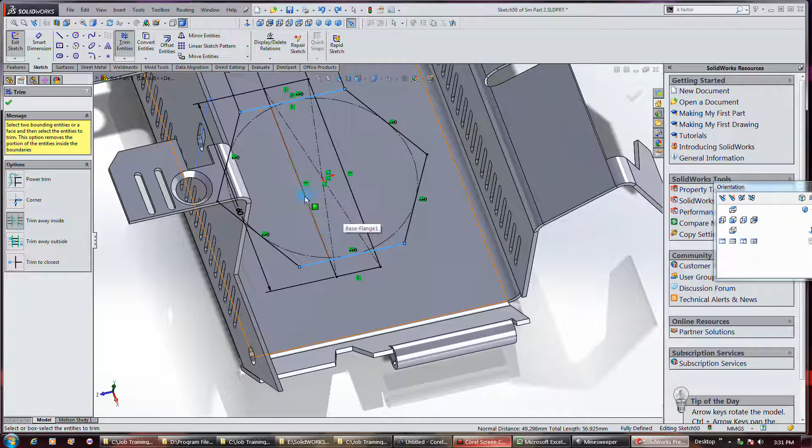Okay, I'm drawing this thing to cut out. Trim entities, select trim away on the inside, choose these two curves, or these two lines, and then trim that away, and then just go like to here, and holy shit.

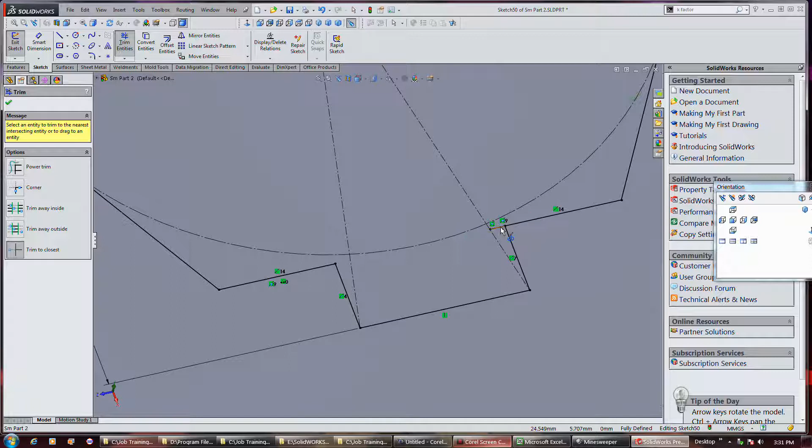I don't know why I need these circles and shit in here. Okay, god damn it. Alright, now let me take that and do a whole cut thing, you know, link to thickness, and voila.

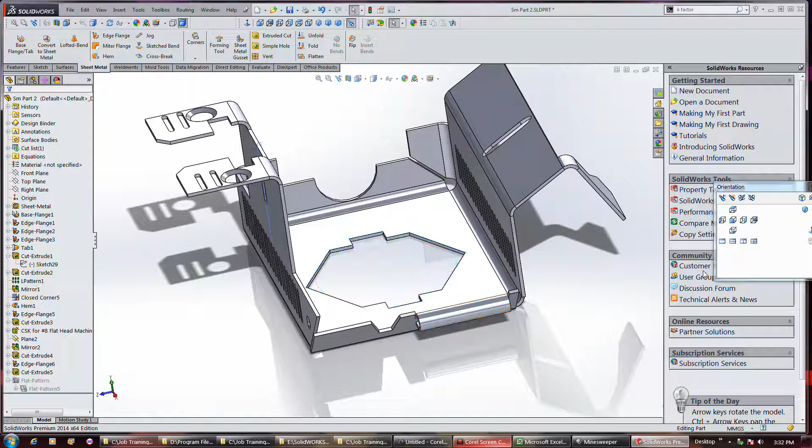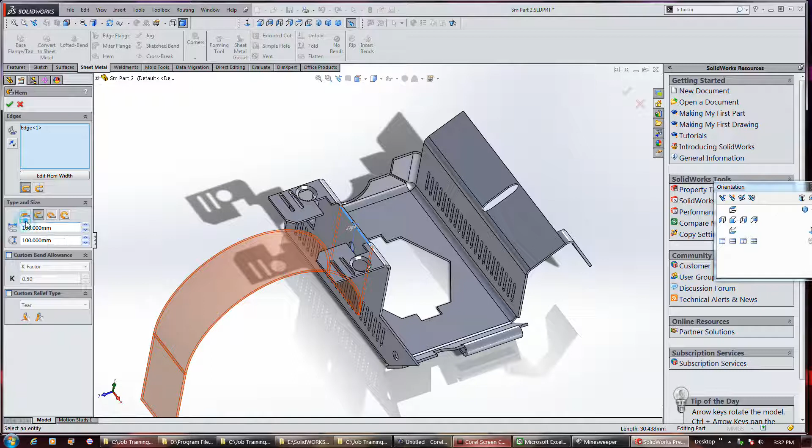And let's go put one of those - well, not an edge flange, hold on. Those hems on this. Okay, we don't want it that big. Well, this came up with 100. Well, screw it, let's just do it this way first.

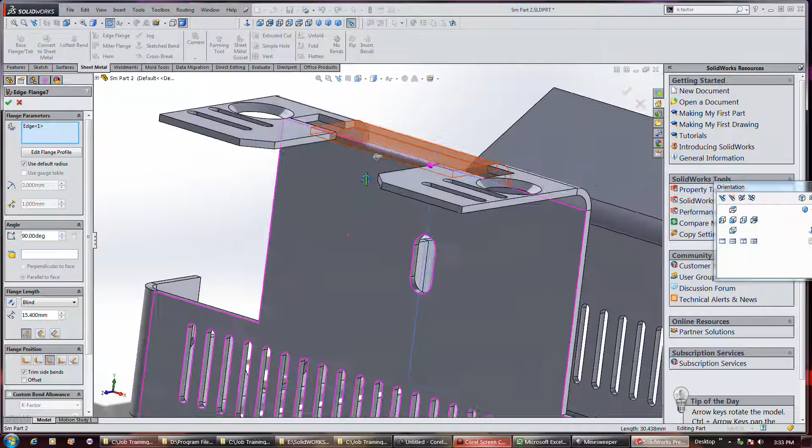Put one of these on it and bring it out to like there. Fuck that, I'm gonna reverse this. Choose that, and then we'll put a hem in this. Not at 100, wherever the hell it got that.

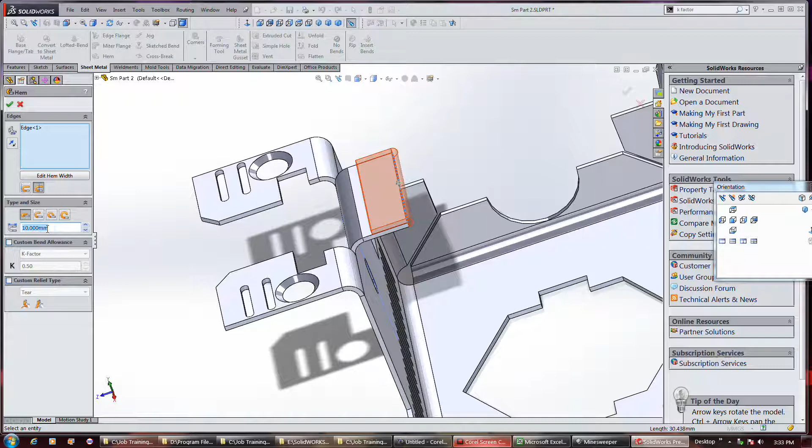And we'll mount it on the outside this time, and do it like that.

Okay, I'm going to go apply a bend using this feature because it looks like the only way to do it, honestly. You know, you really just draw a sketch, you know, where you want it to bend, and sketched horizontal, vertical. That's interesting.

Anyway, okay. Exit sketch. That takes us back to our bend command. Okay, and then, you know, it's asking us for a fixed face, so we don't want this face to bend.

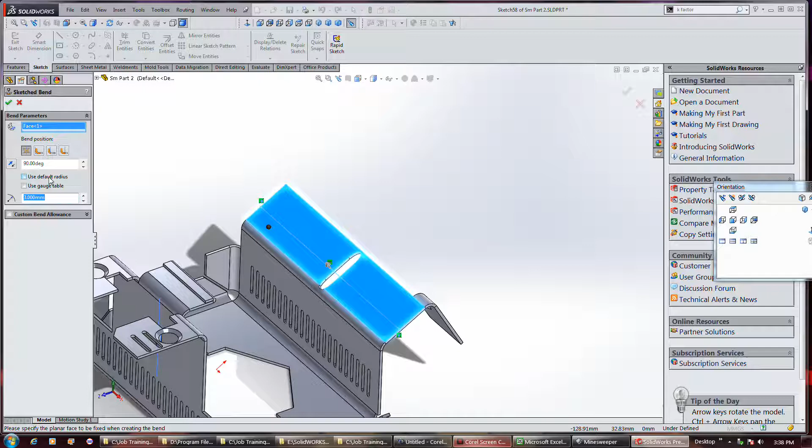And 90 degrees is fine. Material inside, bend center line, you know, etc. I use default radius, which we could put our own radius on it. In fact, I think for the fun of it, I'm going to put my own radius on it. And there we go.

Now, in the jog command, when you go into this, it wants you to draw basically a line, a single line for the jog, but once you do, you've got these properties that you can specify. That may be too small, given the bend radius.

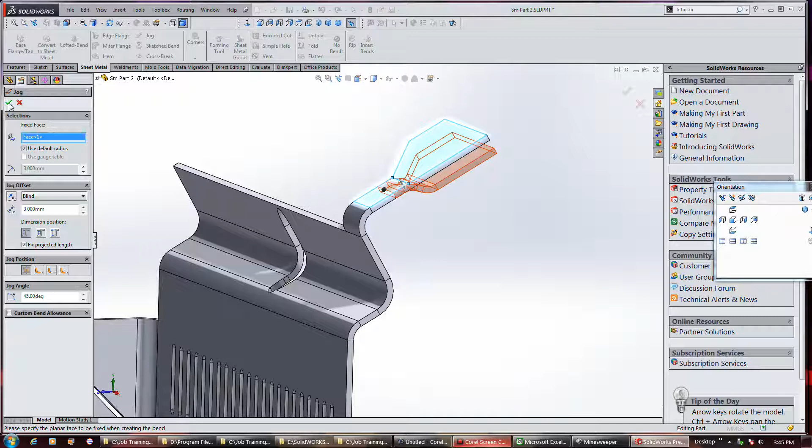Keep it to 45 degrees, and that helps. So, again, I can certainly reverse the direction and all that good stuff. So, anyway.

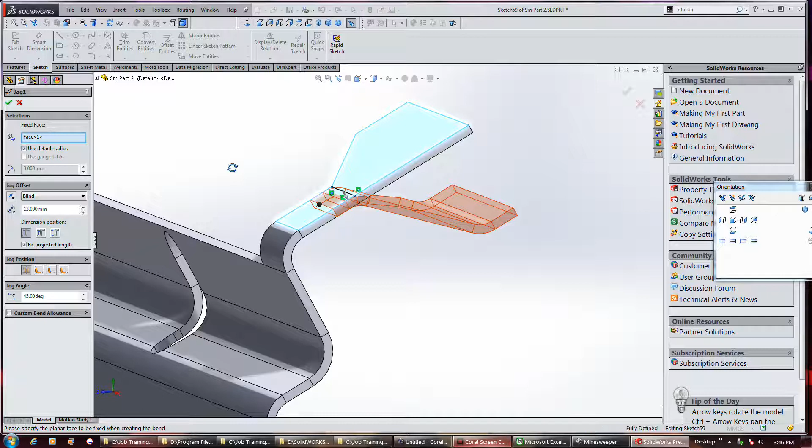Now, something to be noted on that feature is that you have this fix projected length. If I uncheck that, it changes that parameter considerably. So basically you can see that the fixed overall length is actually out parallel to that projected. But if I remove that, well, of course the feature is not going to work very well.

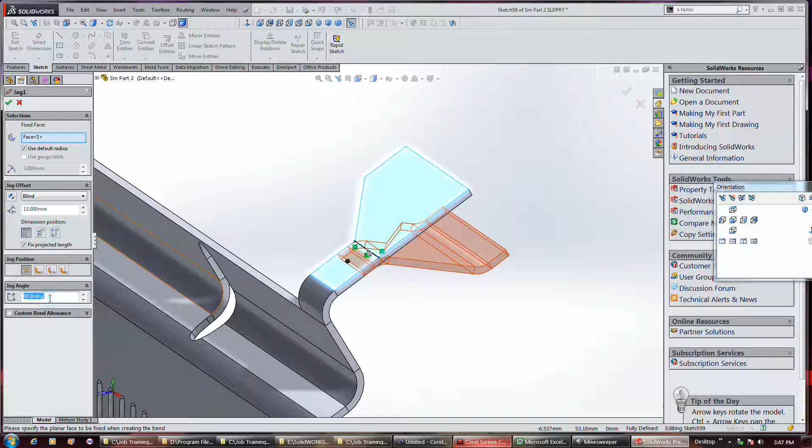But you can kind of see what's going on there a little bit. So if I make that like 90 degrees, remove that, okay, that's going to really shrink that thing back, as opposed to leaving it like that. So,

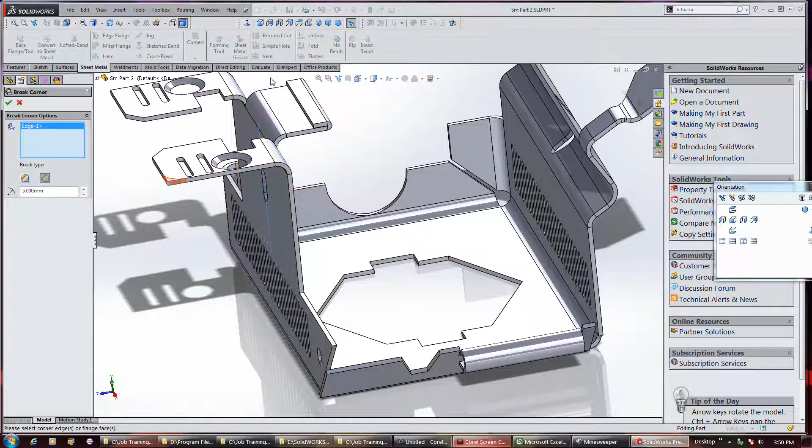Okay, I'm in the break corner command under corners. So it's kind of equivalent to the fillet command a little bit, in the sense that we can produce fillets or chamfers.

These, remember, we drew those in. But it's not quite the same exact command as break corner, because you really can't select edges to fillet, so you choose chamfer or fillet, and it makes a straight up chamfer. It's not as fancy as the other command, but again, it's appropriate for sheet metal.

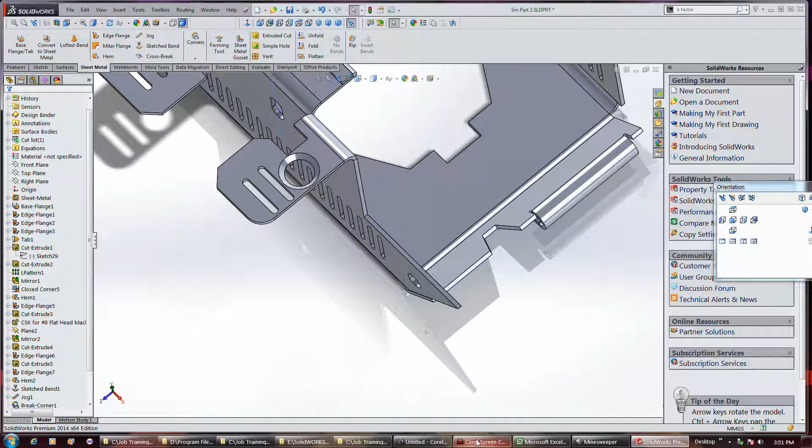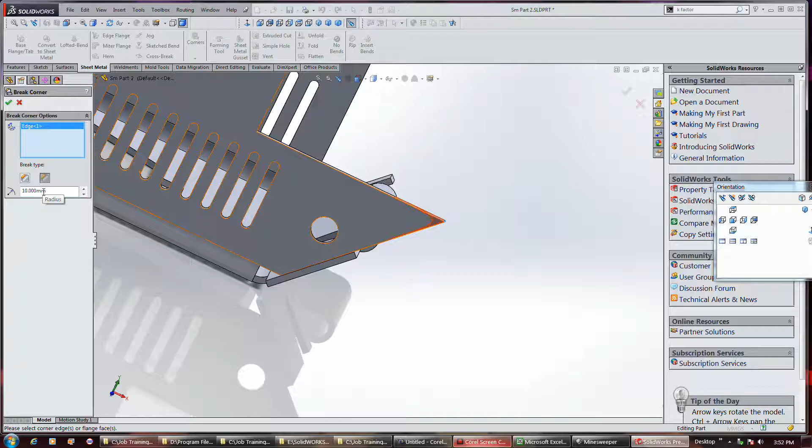Oh wow. That certainly wasn't a very good preview. Huh.

Shit. Yeah, that's not a very accurate preview.

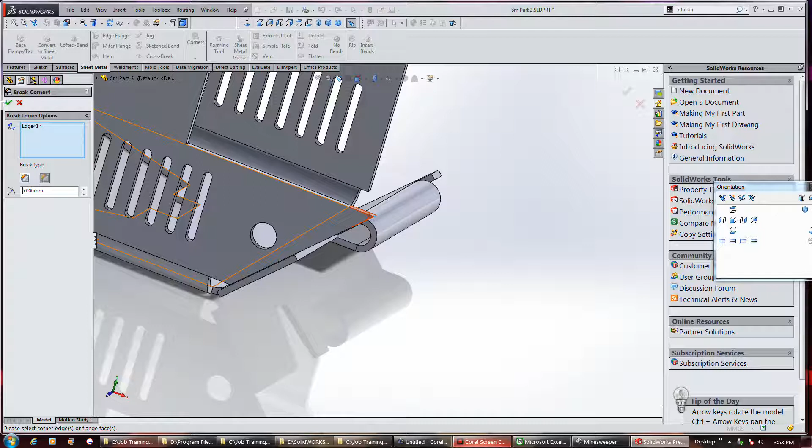So anyway, that's to be kept in mind. Another little bug. Alright.